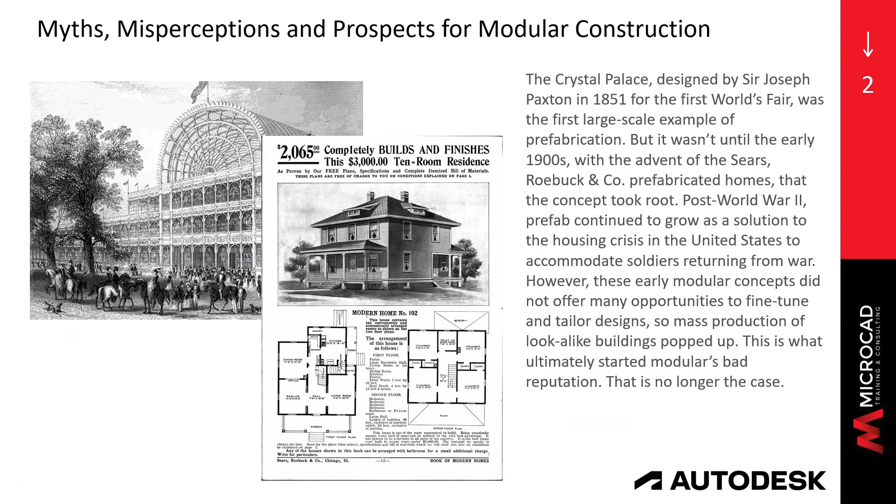And that is something that is not true nowadays. I would say that the biggest and greatest misconception about modular buildings is that they aren't formidable enough or built to last. The truth is, quality is among the greatest advantages that modular construction can have.

These structures have tighter tolerances due to fitting components in the field, and they can withstand whatever extreme weather Mother Nature can offer.

Because all these buildings are built and fabricated in a factory, that leverages robotics and computer-aided technology to create these specialized building components. And the predictability of the parts and the replicability of building parts lead to higher quality products as people oversee the development and conduct rigorous quality assurance testing, which helps for continuous improvement.

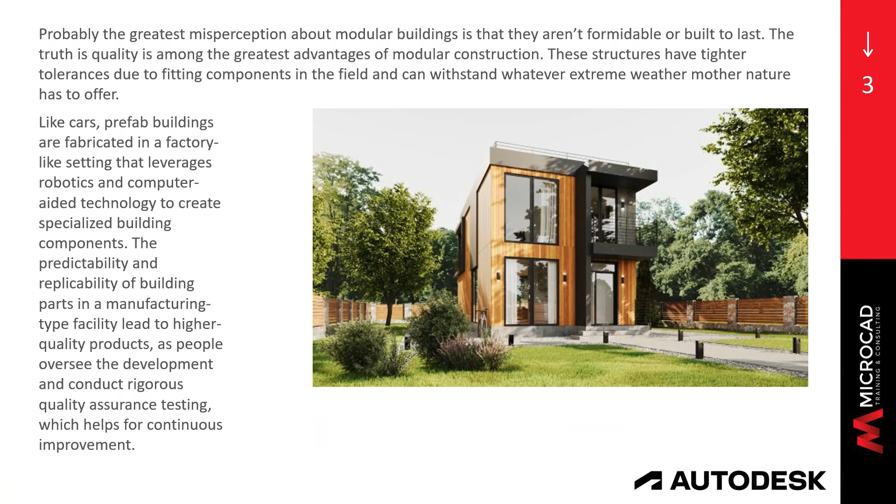The other big misconception about modular architecture is that it relegates the builder to a standard design that is going to be lacking color or lacking character.

However, high-end modular buildings are virtually indistinguishable from their stick-built counterparts. So with the help of today's CAD programs, you can design, refine, and tinker with modules from the macro level to each teeny weeny detail.

And this level of customizability has made the process infinitely more creative. And when it is combined with computer precision of robotic construction, the only thing that comes between an architect's vision and construction reality is physics.

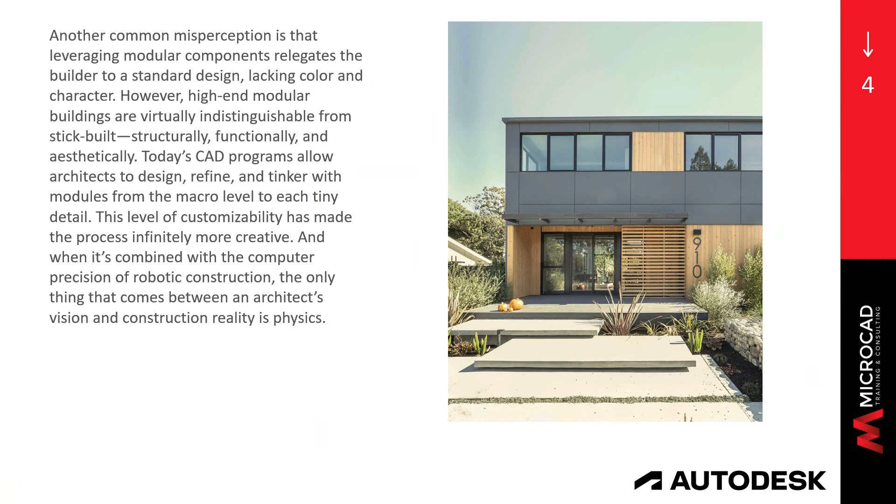We come to structural engineers sometimes bitching about architects becoming too creative. Now, if I want to

predefine modular housing, modular housing design is a construction method where homes or buildings are built in sections or modules, and then they're assembled on the site.

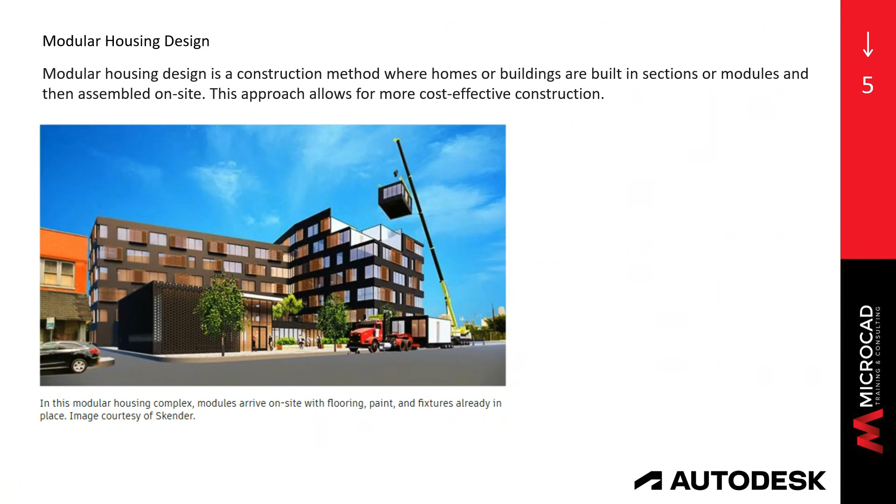This allows for a more cost-efficient construction. I mean, most of it will be done in a factory, not on the site. And we all know that time on the site is so much more expensive.

So this concept of modular design is going to be really revolutionizing, and I think we're just seeing the beginning of this revolution called modular housing design. I think the more that we go into these prefabricated modules that can then be assembled on site, thus drastically reducing the construction time and costs.

You have to think about it. It's like magic. For me, this modular concept is definitely like magic.

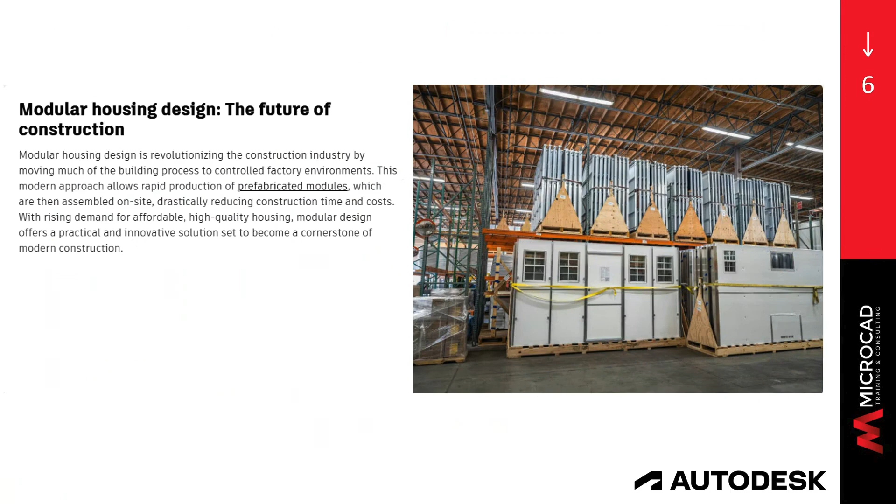And the rise of demand for affordable, high quality housing is going to make modular design the practical solution for homeowners. So when you start planning your floor plan and your building with the concept that you're going to do a modular design and that you're going to streamline the construction process,

you're going to be able to be so much more aesthetic, and it's going to minimize delays, and it is going to ensure a smoother transition from the factory production to the on-site installation. And you're going to have a faster, more predictable build that maintains high quality standards.

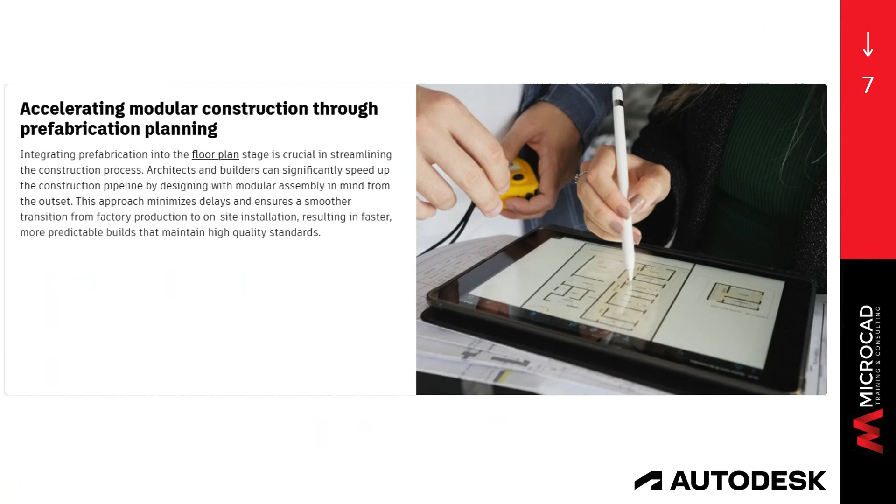The other huge advantage of modular design is that we are going to be addressing housing insecurity and sustainability globally. So it has the potential to tackle critical global challenges in the architecture, engineering, construction, and operations industry. Modular design offers scalable, cost-effective solutions to housing insecurity, providing safe and affordable homes where they are needed most.

And it's also going to be a more sustainable solution than traditional methods. It is going to generate less waste. We're going to be using fewer resources, and we're going to be able to incorporate energy efficient technologies so much easier. So the added benefit is that once developers realize that they can get quality and style, starting with timeliness.

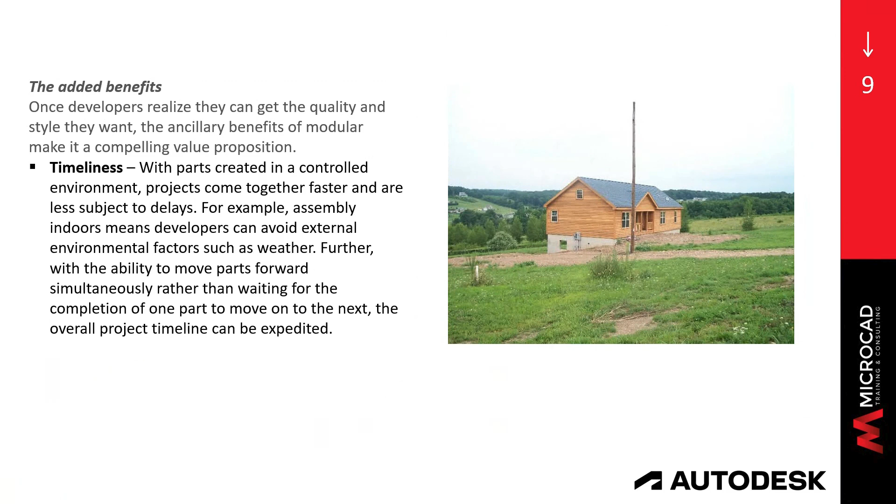And it is mind-blowing when you are sitting on the side and you see 3 tractor trailers coming in with the 2 halves of the house and the roof, and then they go about it and put it together, and lo and behold, 24 hours later, you have that house built on the site.

Next subject to keep in mind is definitely safety. Because when you're doing modular and prefabricated components that are built in a factory instead of on the construction site, you absolutely reduce construction site injuries.

Fewer people, fewer vehicles, fewer moving parts are going to be producing enhanced safety. And then we are in an era where we have to do more with fewer people. That is the reality of our lifetime right now. And skilled workers are retiring. This new technology-enhanced factory environment is going to be crucial.

In the fabrication setting, there are fewer unknowns compared to the construction site. Building components together will allow employees to enjoy regular hours, predictable commutes, better training, and consistent supervision. So this industrialized approach to construction will create safer, more predictable projects while providing certain schedule, cost, and quality, all attributes that make construction jobs more desirable to a diverse pool of talents.

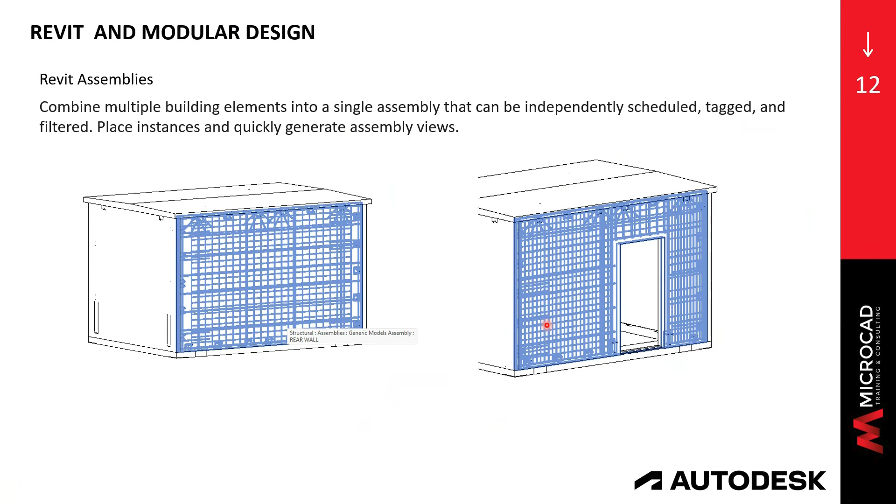Okay, we're talking about this initial level of modular architecture, panels that are going to be wall panels, right? You can have a solid wall panel like we have here. We can have a wall panel that contains a door. You can have wall panels that contain windows. They can all be created in the factory and then just shipped with a tractor trailer and a crane into the site and be assembled together. I myself have seen this happening, and it's mind-blowing. Okay, that is the first level of modular design.

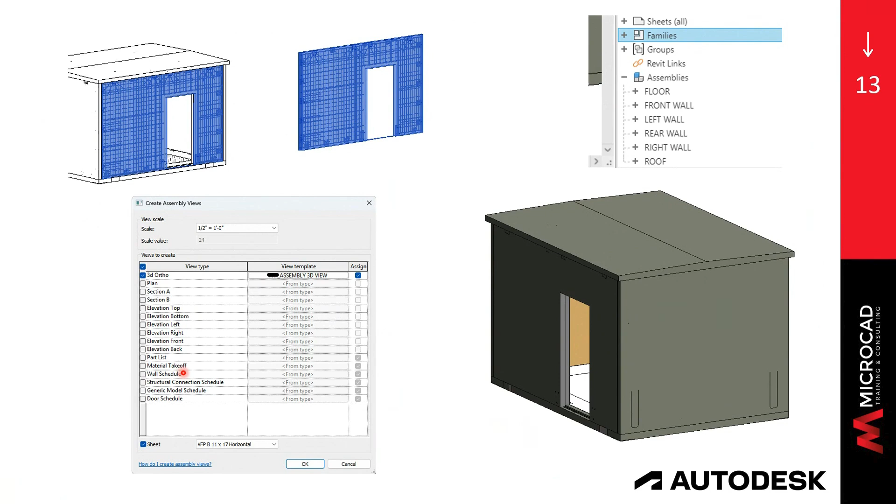And the advantage of assemblies is that it will create an added node in the Revit project browser where you can just grab the floor, a front wall, a left wall, a rear wall, or a right wall or a roof and just put it together. And as per each of these elements, you can create the views that you want for them. So that is level one of how Revit can contribute to modular design.

Okay, level two is Revit groups. So if you start grouping, repeating design, you will have a local base point that will allow you to switch in and out in different solutions to align these points. And then you can also create a library of layouts for future use. Okay, and you can start combining all these groups into the whole building.

Now, groups have another huge advantage in Revit, and it is that they can be exported out and saved as Revit projects, separate Revit projects. And then you can build huge buildings. Again, here I have seen this happening. I've seen it happening in two different jobs that I was involved with, where a Revit model was produced of a housing unit. And then through using a site project and shared coordinates, that model or those different types of housing units, in the first project, it was like 6 or 7 different housing units that made the building, and each model was a separate housing building.

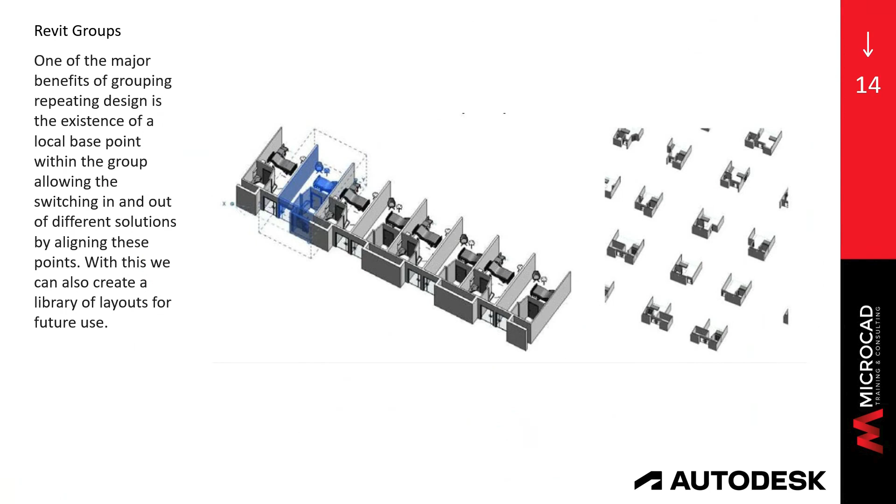Housing unit. The advantages of that are going to be portrayed in my next slide. So when you have, we're going to call this the module, we're going to have individual modules as links from all the disciplines. So you're going to have a module model.

We're going to have the electrical parts, the mechanical and piping parts, the structural parts, and you're going to have the architectural part to have a solid model put together, right?

And then these files can be saved in your company's library and can be reused. So if we put everything together as a concept, for me, it's mind blowing, right?

You can start with assemblies, and then with those assemblies, start putting up your modules however you want to create them. You can create modules for bedroom units, bathroom units, living room, kitchen spaces, and put them together. You can create modules of your whole houses.

Now, the advantage of having all this done in 3D, as it goes with Revit, is that it makes it very easy to convey to the clients. In conjunction with other softwares, for example like Enscape, you can create live walkthroughs where you can really convey your design intent and design in a modular fashion.

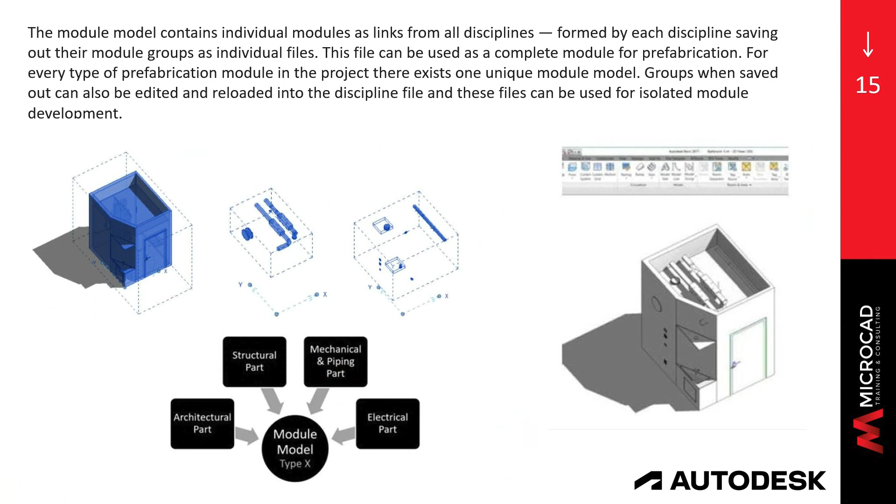So with this whole story, I am going to open up the floor for questions. Thank you, Sandra, for this wonderful presentation. Let me go over the questions.

The first question is, why would you choose modular design over traditional design? That's a good question, Juliana. I think that my option for going for modular design, as I mentioned before, is the predictability of the delivery schedules. As I mentioned, that house I showed you before, we knew exactly when the house was going to be inhabitable. And if you have ever been involved in building an actual house, delays in the construction site are something you have to live with, which is something you can completely avoid when you go with the solution of using modular design.

Second question is, with the use of Revit and the tools that you showed us, can you still have a custom designed home? Absolutely, absolutely. And I think that has been my biggest point in this webinar, to get away from that myth that modular design is like cookie cutter. The houses that are there in the market—and my shout out to all the companies already doing modular design in the United States and worldwide—you have beautiful designs out there, so the choice is immense. And I know as a fact that you can sit with them and talk about your needs and wants and customize that house to make it feel as if it is a designed house, it being modular, by cutting the costs to less than, I think, about 50% of traditional construction methods.